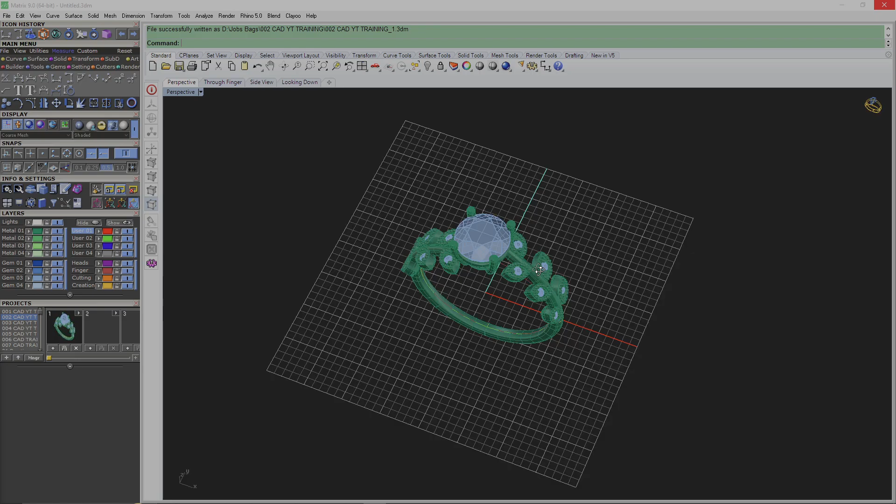So it's basically this ring, right? We're gonna go ahead and delete all this, and I'm gonna start from the beginning. Delete that.

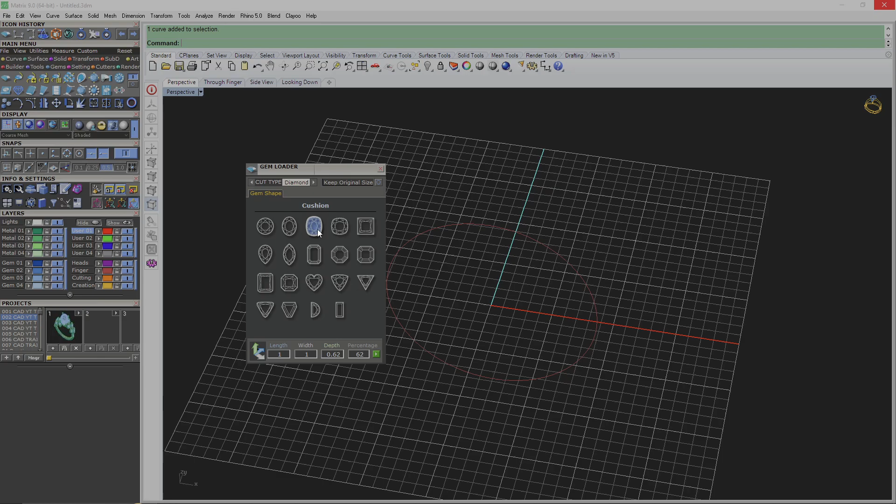Now we can start by the ring rail. Size should be approximately size 7, and then we're gonna get a 1 carat diamond. You can try this in different kinds of gemstones or different kinds of diamonds, like round, oval, cushion, but we'll go with the default. We're gonna start with round, 6.5.

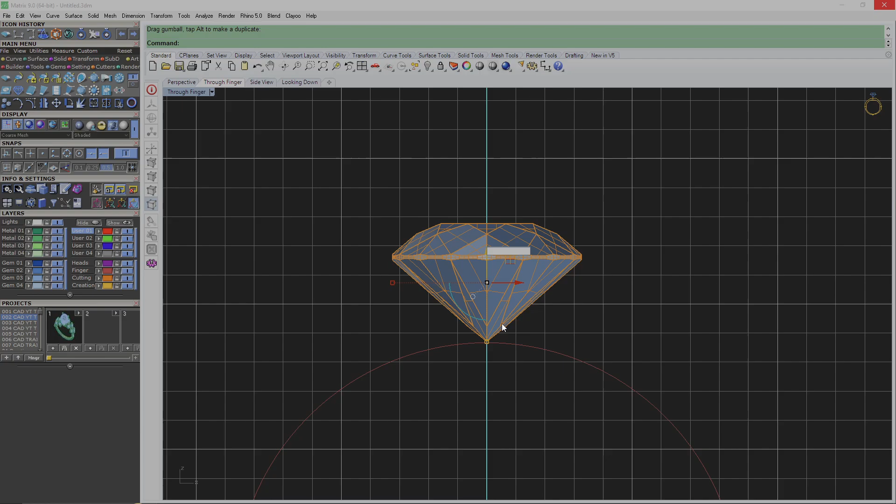When this thing shows up, when the gem shows up, just pull this up using your gumball, just put it up. Approximately it's gonna be above the ring rail, about 1.2 above the ring rail.

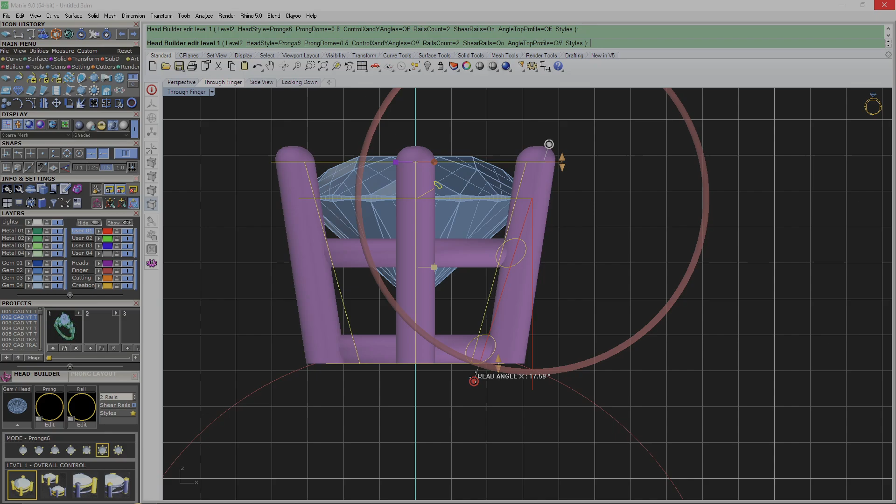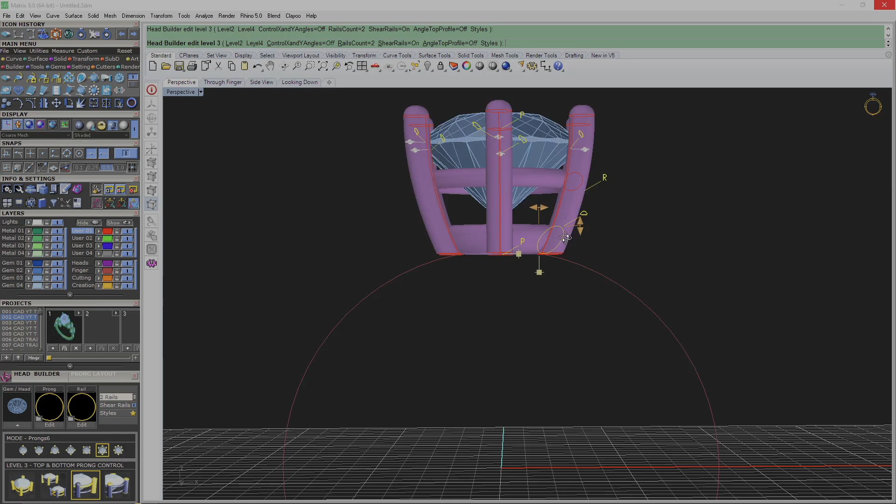We're gonna go ahead and adjust this a little bit more. I hope this video should just last less than 10 minutes. I try to make it really fast. If I'm being fast for you guys, just try to pause the video.

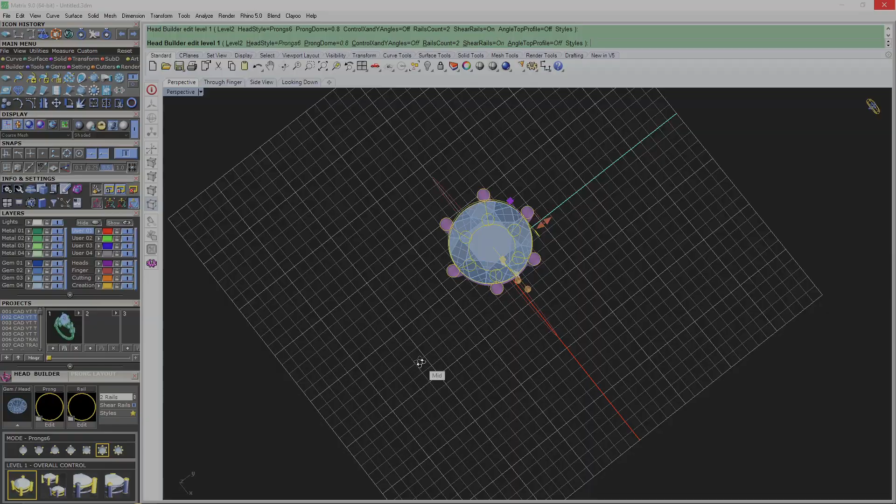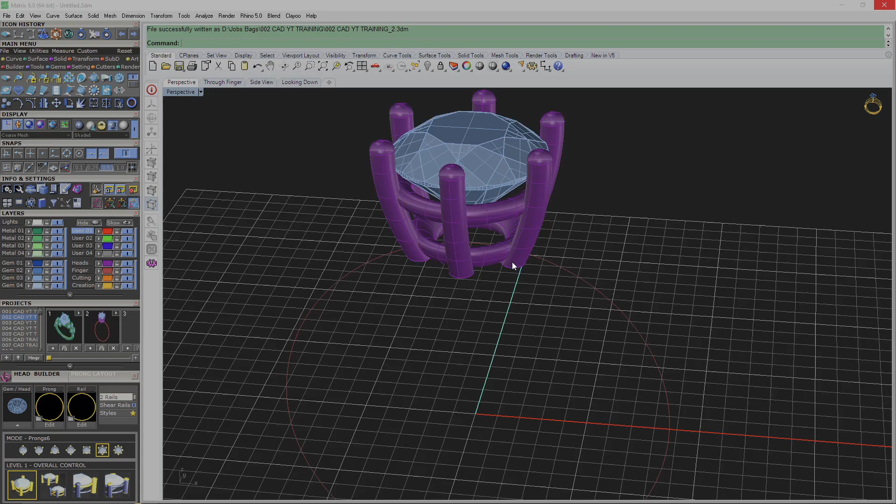This is 6-prong. You can make it 4 prongs, but right now I'm gonna use 6-prong for this center stone. Go ahead and press enter on that, and what we want to do is save along the way. When you're designing, you want to save the project, so that way when your program crashes or something happens, your power goes out, you still have that design.

So from here, what you want to do is cut this rail. We're gonna cut this in half, from mid here and then mid here. Now we have the half rail.

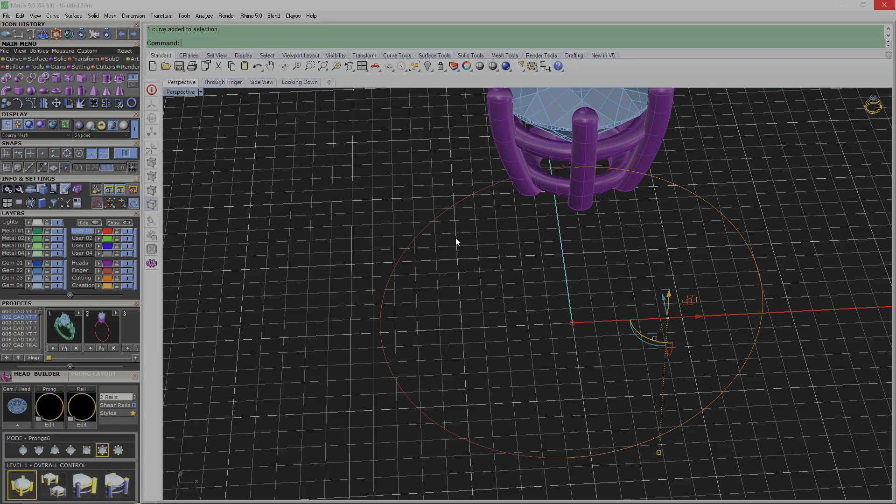We're just gonna delete this one, and then rebuild this by 7 points and then 3 degrees. Press OK, and then from here, adjust these points.

Go to the side view, and then adjust these points slowly, a little bit to the right. Look at it from the side view, a little bit to the right, a little bit to the right.

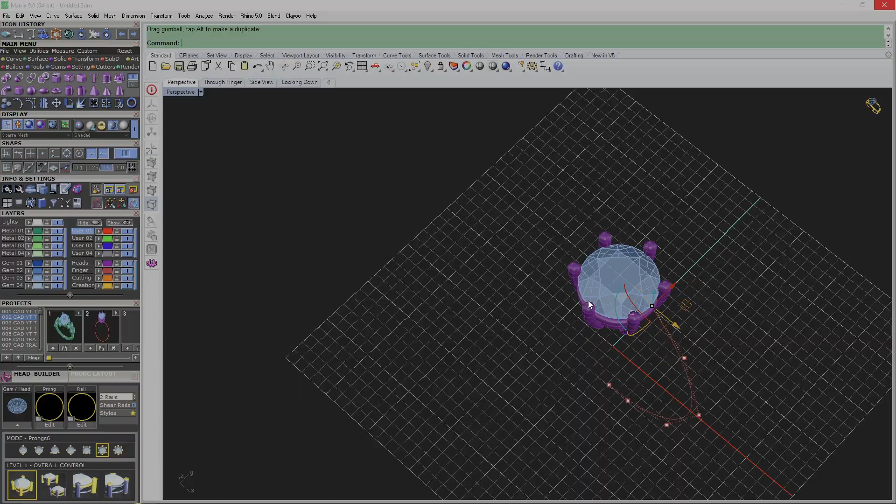So now this is our rail. This looks good to me. Maybe a little bit more.

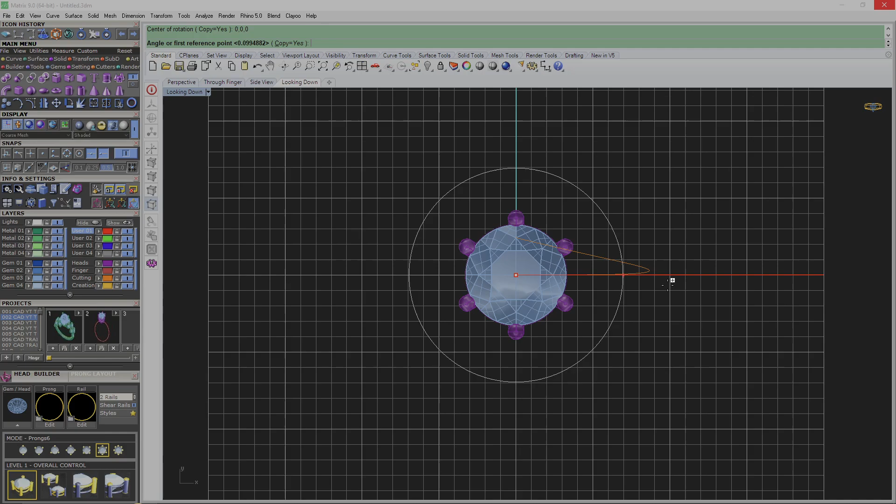Now look at it from the top view. We're gonna go ahead and rotate copy from our center, going this way. Then we're gonna join them.

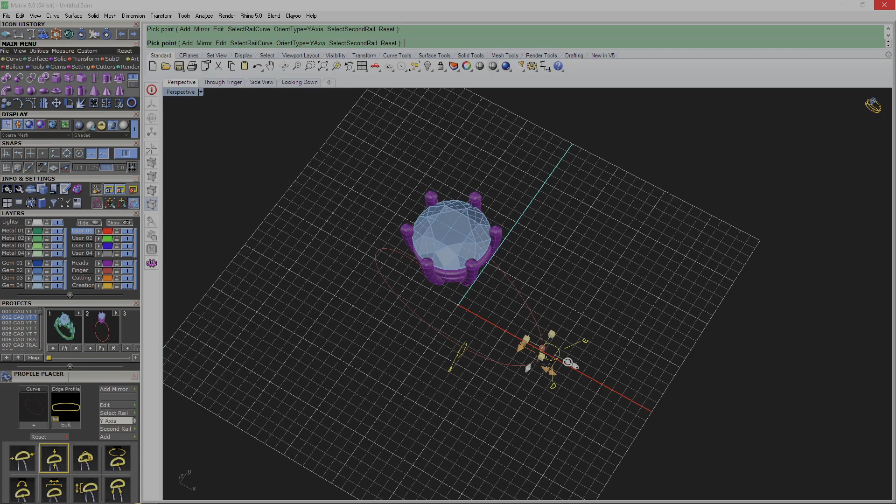Now we're gonna go ahead and put a profile placer on this. We're gonna use this profile right here, and make this 1.5 by 1.5. We're gonna press add on the right side, then make this a little bit higher over here, and add again. It goes up all the way right here.

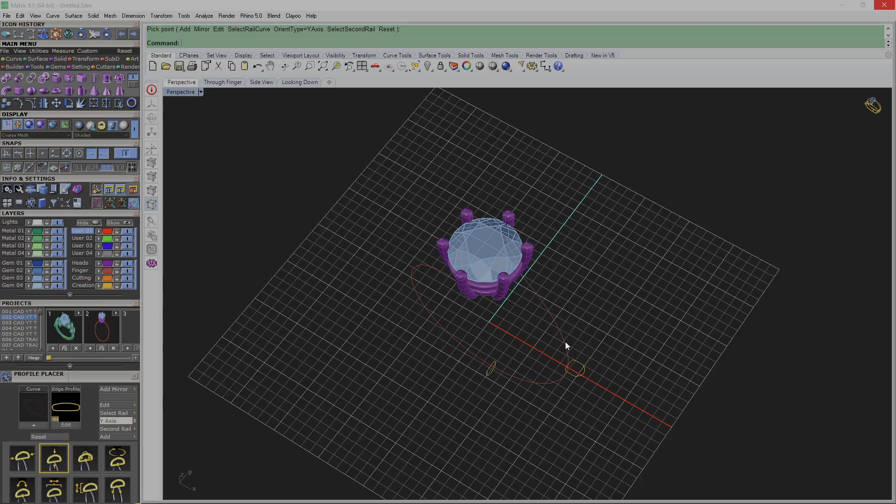We want this to be tapered going up, so make this really thin by 1 millimeter, and make this about 1.8, like so. Once you see it's good, press enter and then save again. We're gonna save this file.

Now what we want to do is sweep this. Sweep one from here to here to here. We're gonna look at the arrow, make sure they're all lined up, pointing in the same direction. There you go.

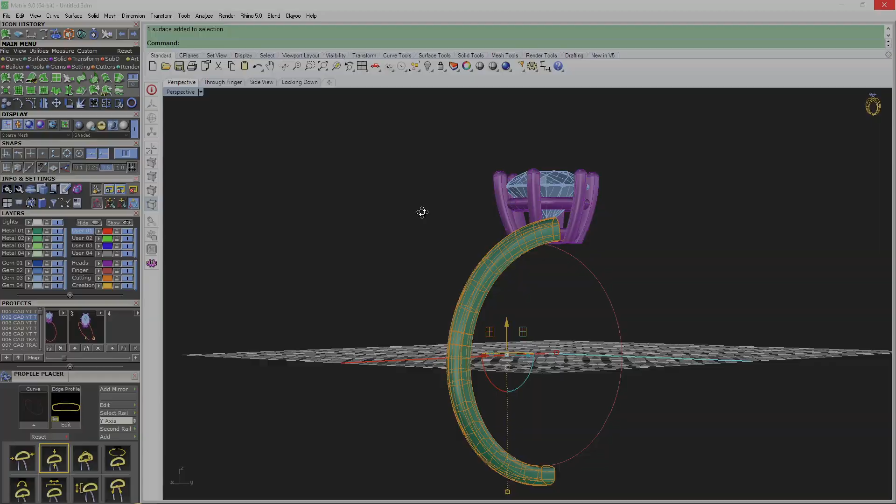So now we have this rail with the shank on it, just a little bit of. Then we're gonna put a profile cap on this, maybe 1 millimeter. Make sure they touch in there, and then join this. Now we're gonna rotate copy again on this, go all the way over here.

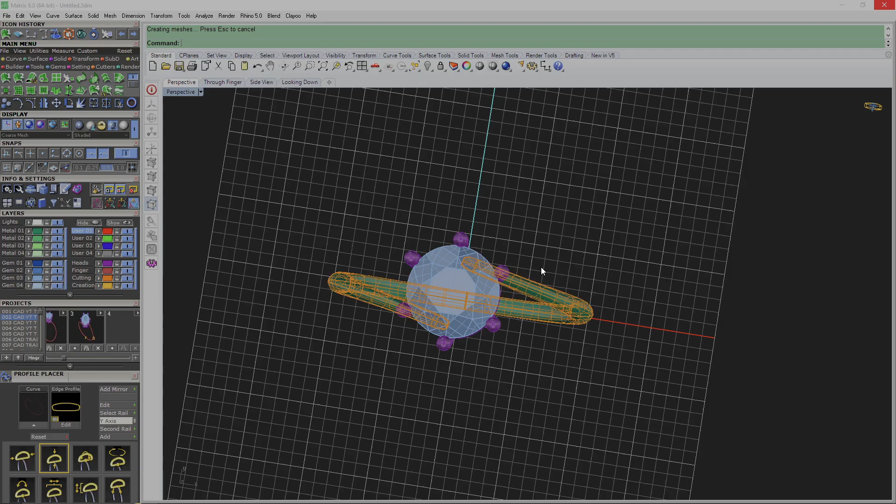There you go. So now we have that. Not bad, right? Not a bad start. Remember, if you want to change how they look, just adjust your profile a little bit.

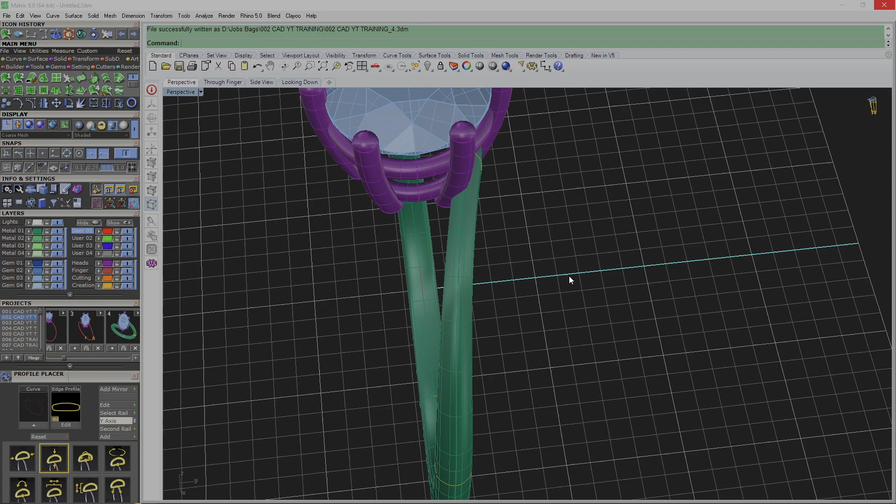But this looks good to me, so I'm gonna go ahead and save this again. All right, so now we're gonna try to make that leaf. What is that leaf? So what we can do is pull out just a 1 millimeter stone right here. Let's see, where's that 1 millimeter stone?

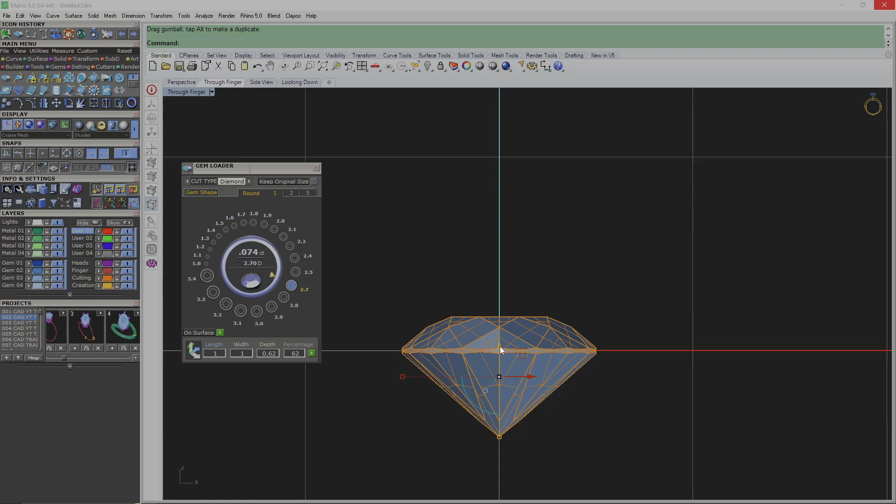Because what we want to do is go ahead and try to make a copy of this again. Just copy that, and then we want to go to marquise, and select the smallest one, marquise, right here. There you go. And if you created a... let's pull this up. If you create a bezel, there you go.

This marquise is just a guide. Basically, we want to hide that, and there you go. We have this bezel, but this bezel is going to be the leaf for our design. So we just want to make this about approximately 1.4.

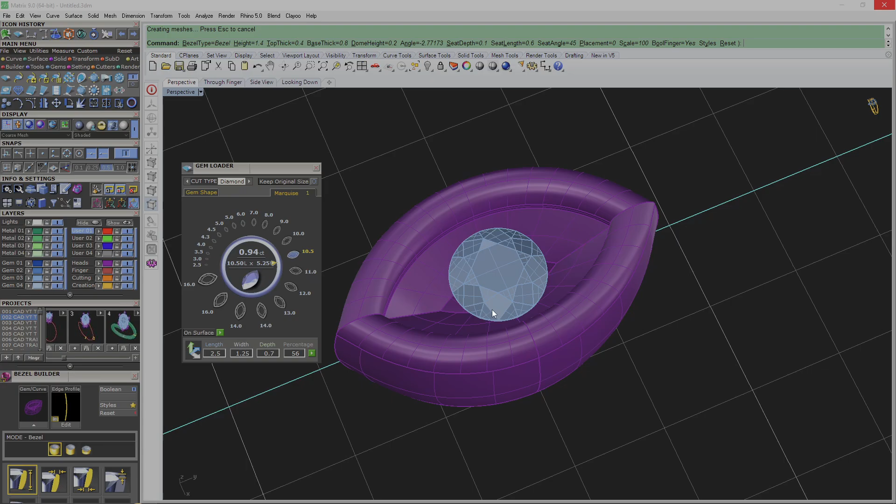This one looks good. Okay, and now what we want to do is fillet this edge right here by 0.4, so they are rounded. There you go. And then we're gonna put a prong on this. We're gonna put 2 prongs on the side, and then extract a line here and do a milgrain.

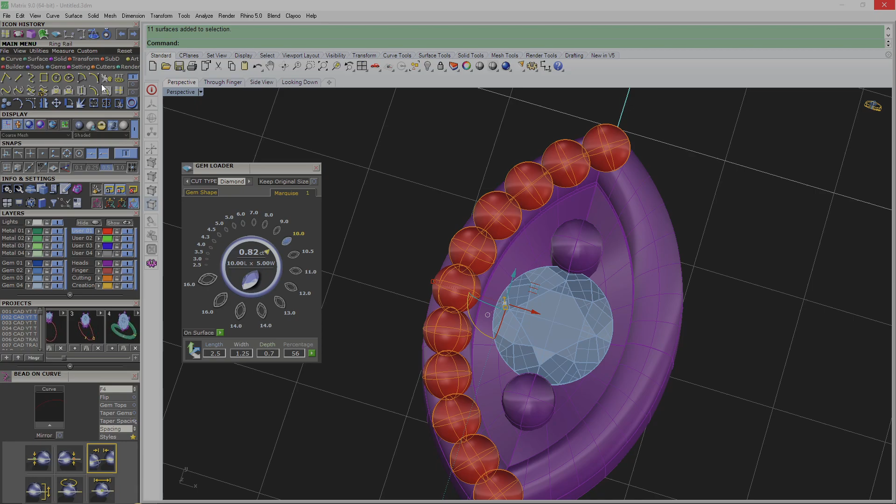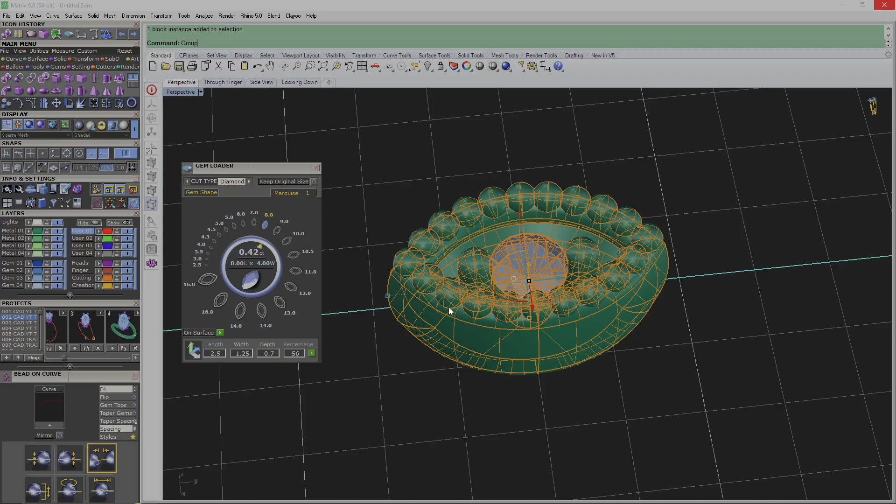All right, so now I'm gonna go ahead and join that, mirror it, join this again. Okay, so there you go. We're gonna put this in the same color, and then group them. You can type group, so that way when you click it, it's just one.

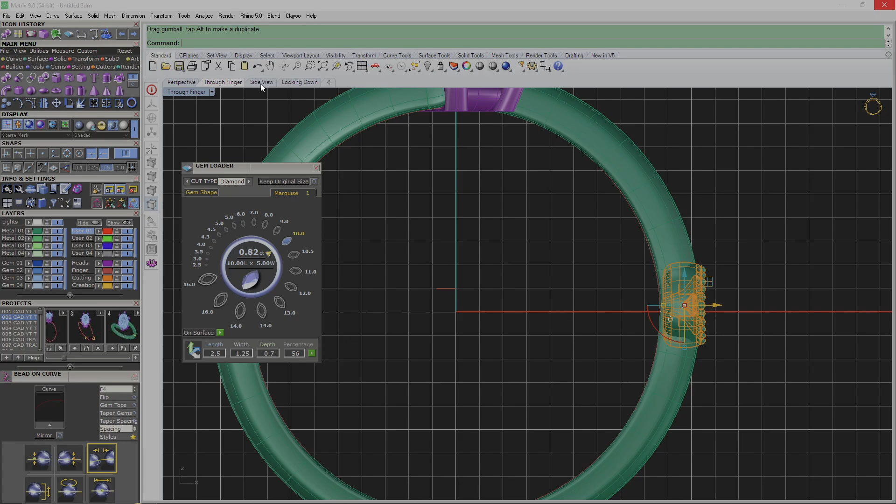Alright, so now what we want to do is put this in the center back again. We're gonna put this in the center, rotate it, look at it through side view. Alright, so this is what we're gonna use for our leaf design.

Alright, so you just adjust it, see how it looks. Mirror on the other side. Okay, adjust it. There you go. Pull this up, rotate it. There you go.

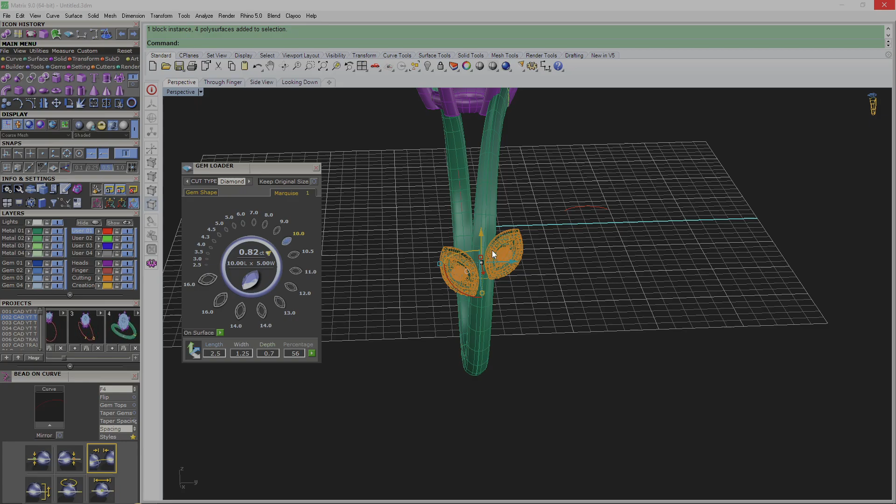Alright, so we're just gonna copy this over here. Okay, rotate, copy from our center, copy. There we go. And then from here you just adjust this on how you want this to look.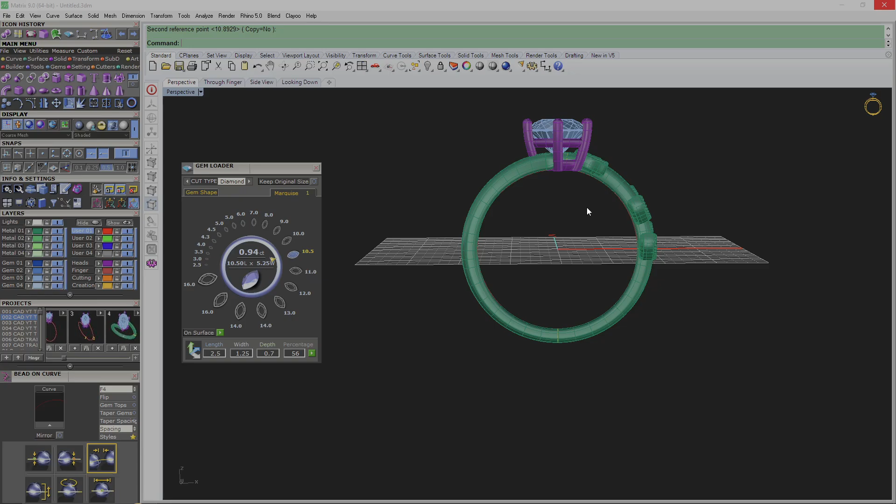Alright, it's a very simple adjustment. Pull this up. Okay, all right, adjust this a little bit more over here. Oh, if you're wondering how this one will go, we can...

Get another rail size 7, right? And then what you want to do is ungroup and pull this to the rail, every single one of them, so that way they go along the rail. Okay, so now let's go back here, add this a little bit more.

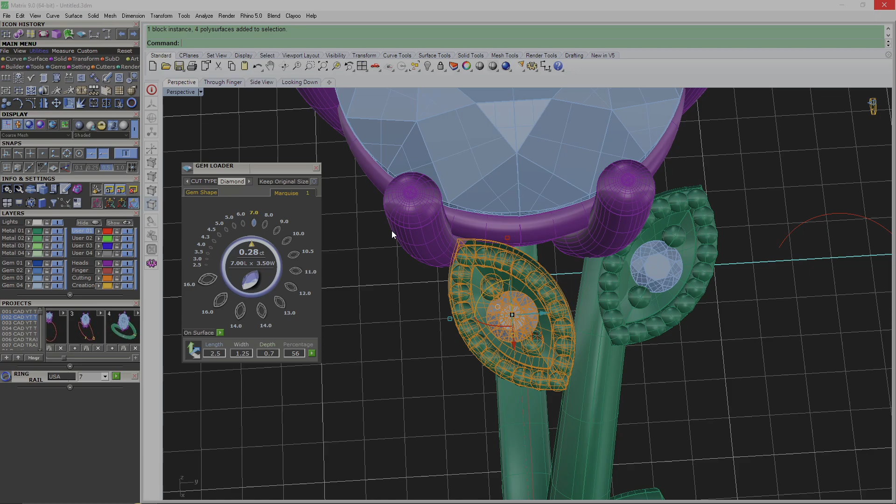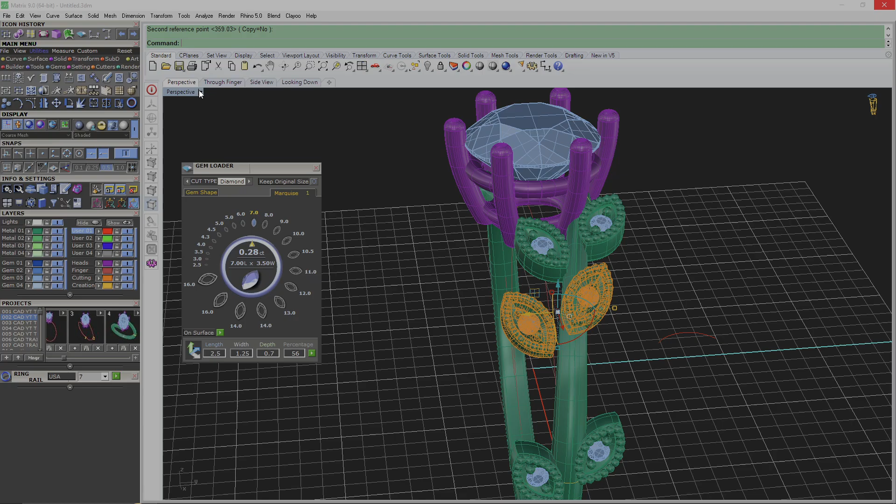Okay, here we go, this side. It's looking good, so now we just adjust this too. Alright, adjust it here to here. Okay, and then the last two over here, just put them up, adjust it.

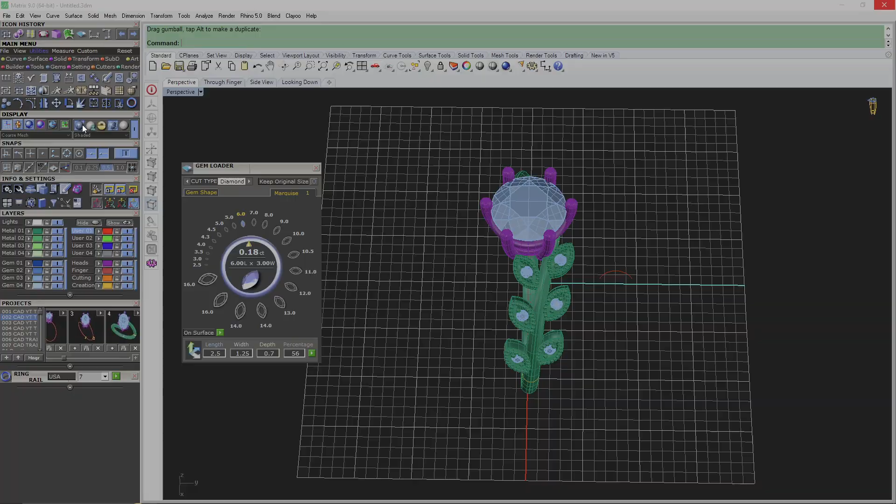Okay, there you go, that's not too bad. Try to see it from your view. There you go, it's not too bad, right? So what we want to do, we just rotate copy this, right click on your rotate copy, press 4 all the way to the other side, and there you go.

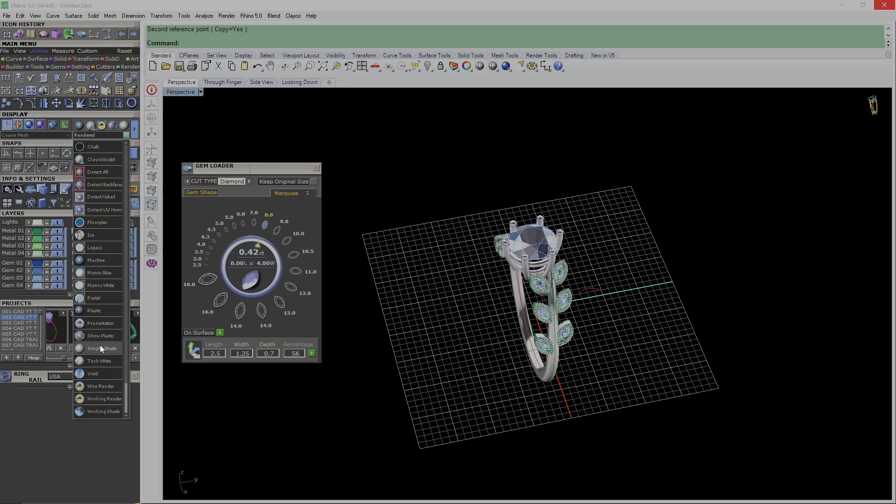We now have this beautiful thin vines leaf design. They're a really simple design, but they look really nice. It looks really good. Okay, if you find this a little bit too sharp, you can always do fillet by 0.2 and then just fillet all of them, the under prongs.

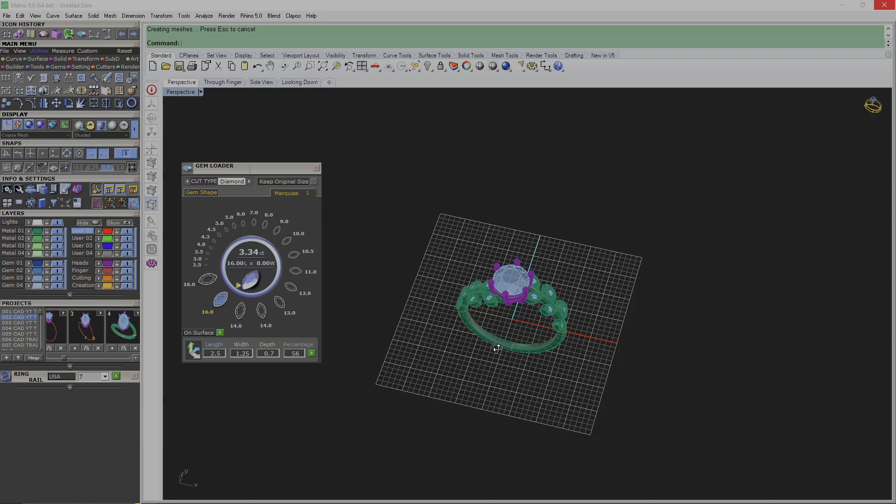So we're gonna go ahead and save this. Yeah, that's basically how I make them.